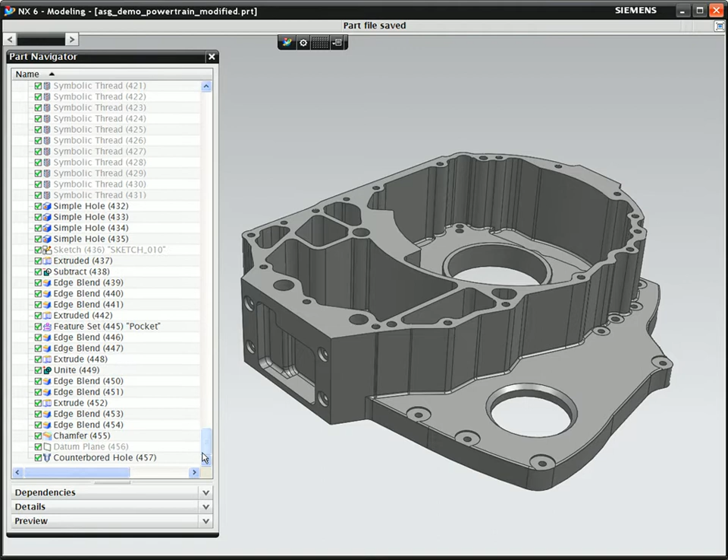NX Design Freedom, powered by Synchronous Technology, combines the flexibility of history-free design with the power of feature-based parametric modeling. You need to change this 8-year-old fully parametric part. If you review the extensive history tree, you would have a better understanding of how the part was originally built. The changes you make will also affect this detailed and associated drawing.

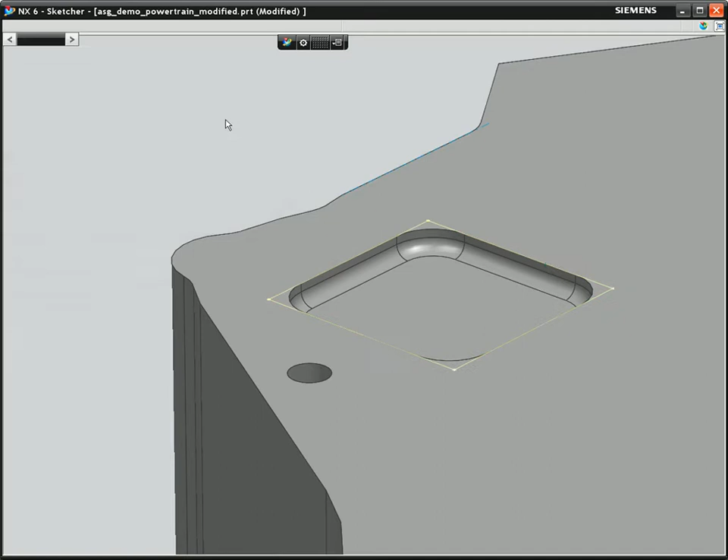Your first change is to modify this pocket. Since it is a basic feature, it should be a simple task. Adding 2 dimensions to the sketch and changing their values updates your design. Unfortunately, this corner isn't what you expected or wanted. When the original designer created the pocket, he could not have anticipated this change, and there is a feature in the model's history that interferes with your change, fixable with time and effort.

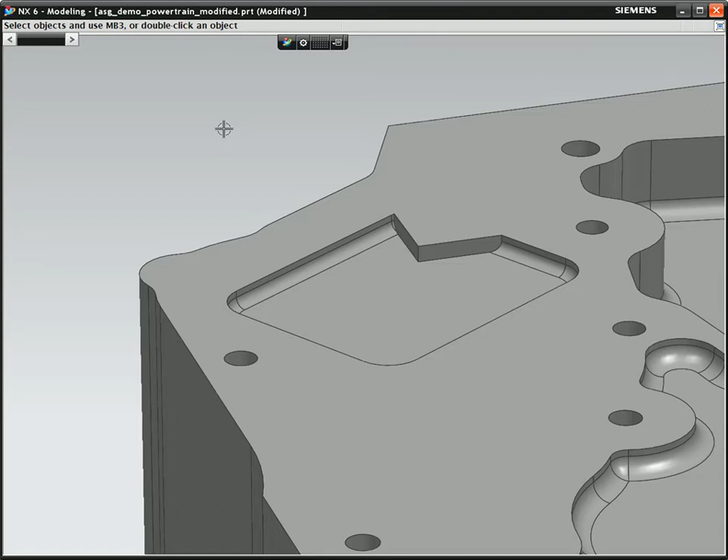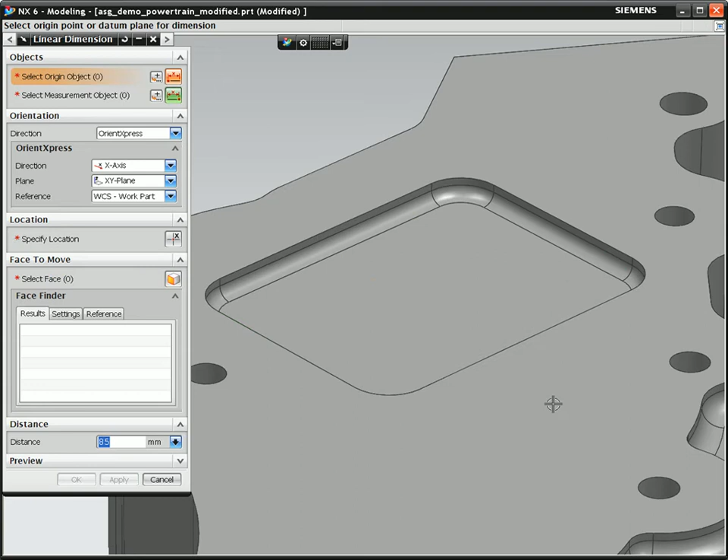Now let's take a look at a different approach. Using Design Freedom, we can add dimensions directly onto the model and drag the geometry to the new size, getting the result we want without needing to understand how the model was originally built. More importantly, you haven't removed any of the parametric data from the model, so you can still benefit from the power of parametric modeling. NX gives you the freedom to design the way you want to.

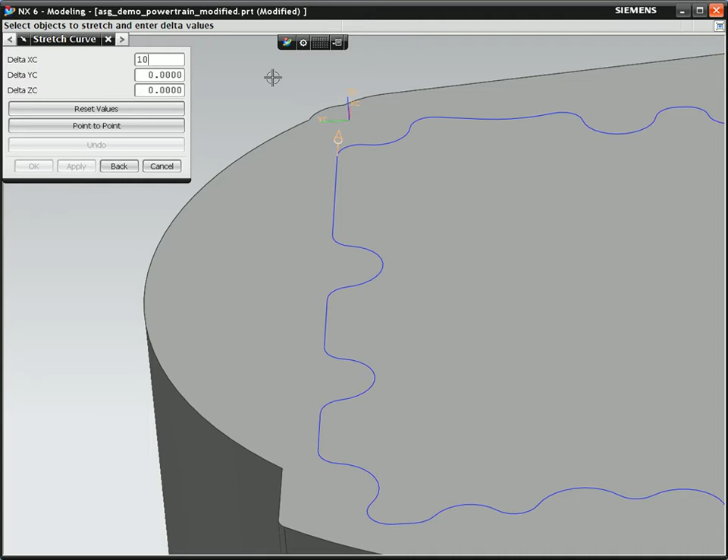The second change requires moving these 2 mounting bosses and holes 10 millimeters. They have been created as part of an extruded profile, which is not a sketch. This is not a problem, as you could stretch the profile to accommodate the change. On update, you can see the bosses are made up of more than one extruded feature, so we now need to further understand the feature history. To achieve the desired result, you need to assign additional constraints to the sketch to center the holes with the bosses.

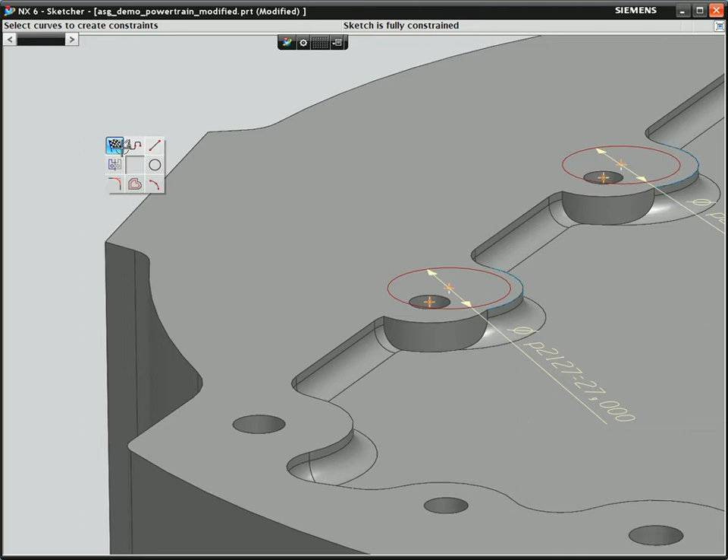With the modification complete, you check the other side of the part only to find that there's a problem with the bosses on this side. If you had time, you could go back to the part history to determine how to make what appears to be simple changes. Stepping the model back, you decide to use a more streamlined process made possible by Design Freedom and which still works within the parametric approach.

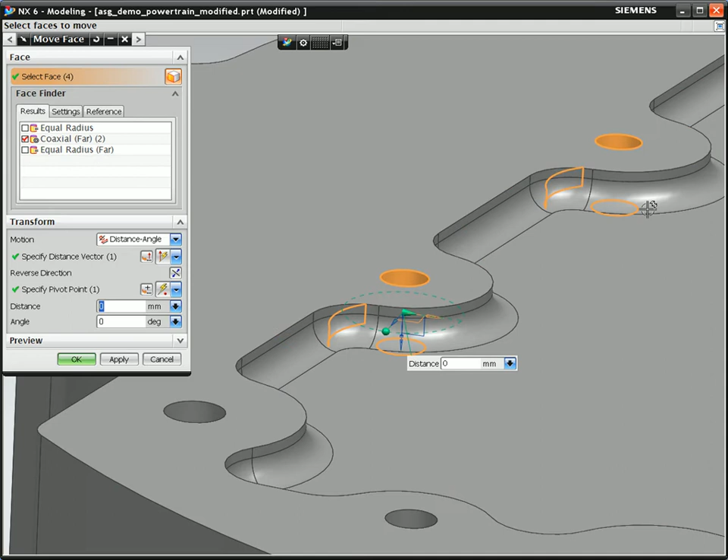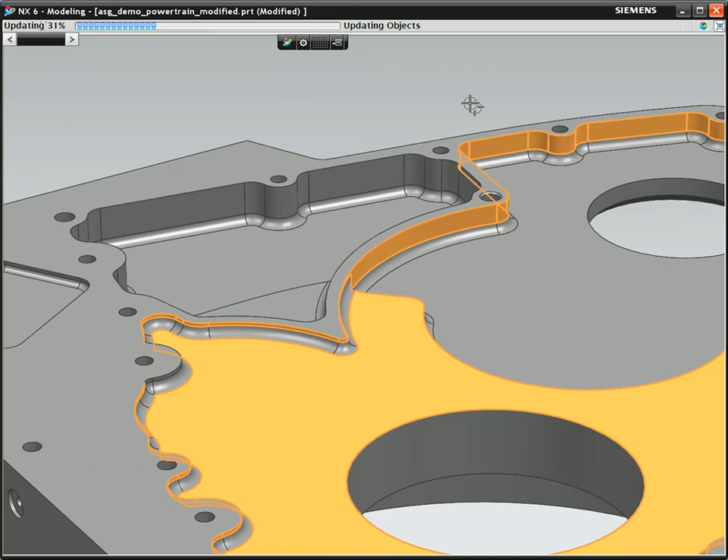Design Freedom lets you select intelligently, like coaxial relationships with active selection, a key component of synchronous technology, while still being able to add individual geometry during the edit. Now you want to move the rib that separates these 2 pockets. The original engineer made this part using 2 separate sets of geometry, so moving the rib by feature editing could be time-consuming.

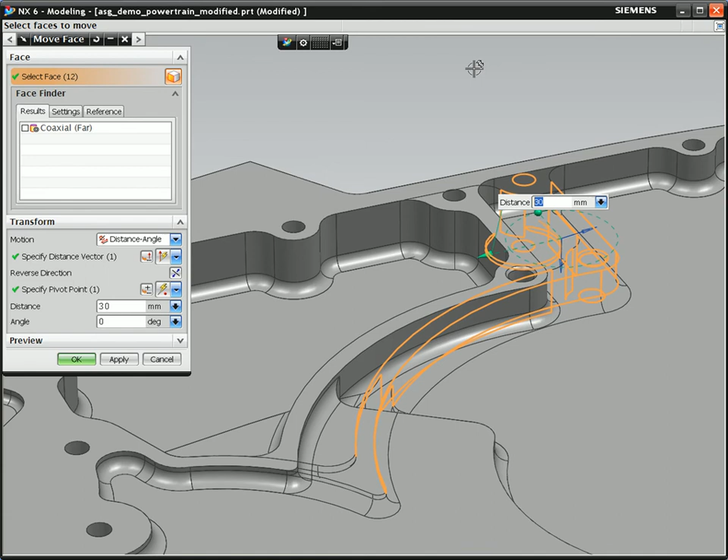Design Freedom makes this simple. All you need to do is select the geometry you need to change and drag it to its new position. Selecting the outer surface causes a thinning of the curved wall, exactly what you would expect. Including the faces that define the wall in the change allows you to complete the design change exactly how you want it.

NX allows you to make changes to your models the way you need to without relying on pre-planning of features and history. And with NX, downstream data, such as drawings, are accurately updated. NX Design Freedom gives you the best of both worlds, combining the power of parametric feature modeling with synchronous technology, allowing you to work the way you want.